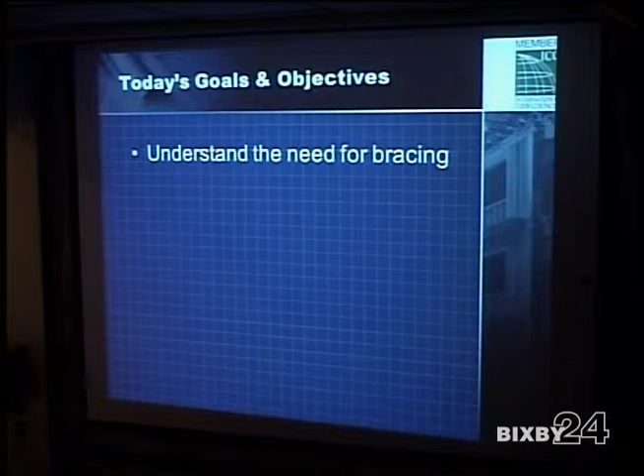The objectives for today are to get you to understand the need for bracing and determine the most cost-effective solutions to meet that. We don't get up here and say, yes, I am Simpson Strong Tie, and talk about our products unless actually noted in one of our pieces of literature. I'm just here to talk about the code.

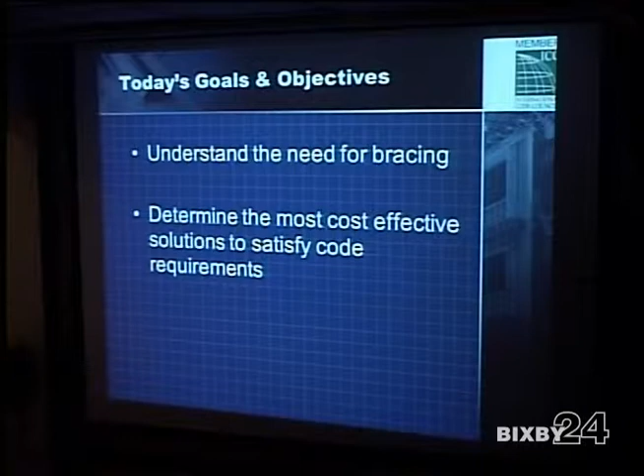We're not the only manufacturer of products, there are others out there, but the way I go about doing it is if I sit down with you guys and go over your plans, I'll suggest resizing a window, moving a door, or whatever. We don't just go through and say you need a strong wall here, you need hold downs there. That defeats the purpose of it. The purpose of the code is to do it the most cost-effective way. So if that's one where I assist you, that's what I do, go through and try to really eliminate any of the hardware.

So you want to do it in the most cost-effective manner.

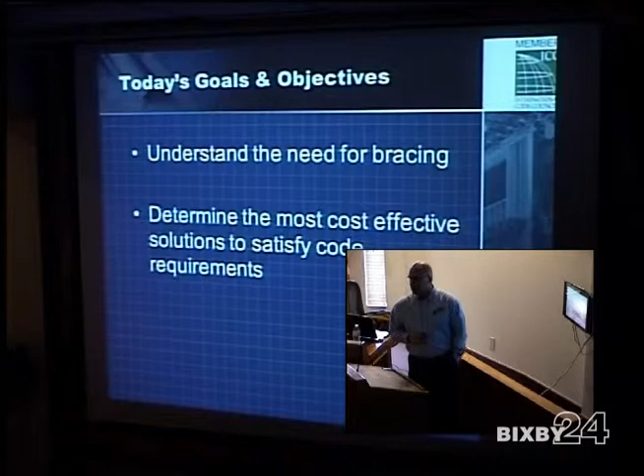Okay, so wall bracing. The three parts of wall bracing that you're trying to resist are these: racking, sliding, and overturning. So if a force is acting on your structure, it's going to start with doing these three things.

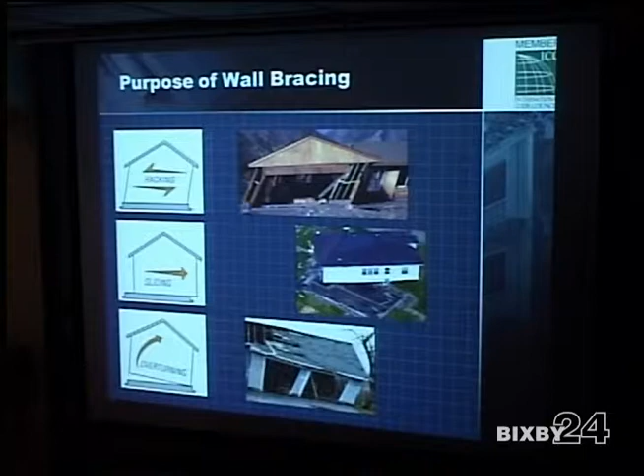So if you've got a wall built, no framing on, no sheathing or anything, and you apply a force to it, what's the first thing that's going to want to do? Right, yes sir, you're going to put force on there. These are just all hinge points here without any sheathing on it. The four corners there are just a hinge. So you apply that force there, and Cecil's exactly right, it's going to want to rack.

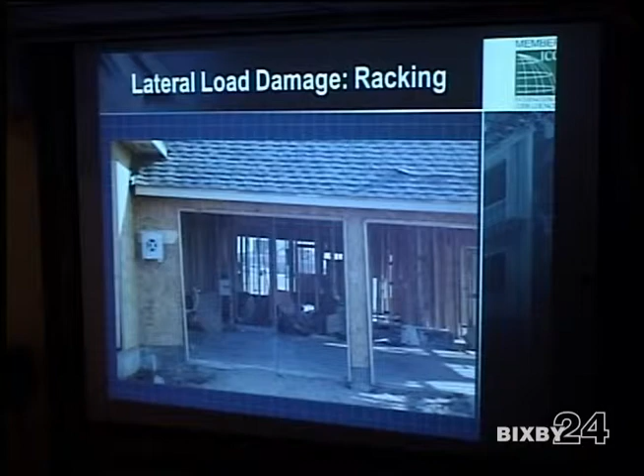So here are some examples of racking, even with sheathing on there. It's not completely built yet, but it does have sheathing, and you're going to get some racking there. So what you want to do to avoid the racking is put sheathing on there, nailing it to your bottom plates and your top plates, and that's going to help resist any racking.

So if you've resisted the racking and you apply that same force, what's the next thing it's going to want to do if it's stiff? Lift? It'll want to slide first. Well, it could - if there's enough pressure and everything's built, the roof's on it and everything, yes, it could definitely lift. But it's going to want to slide there.

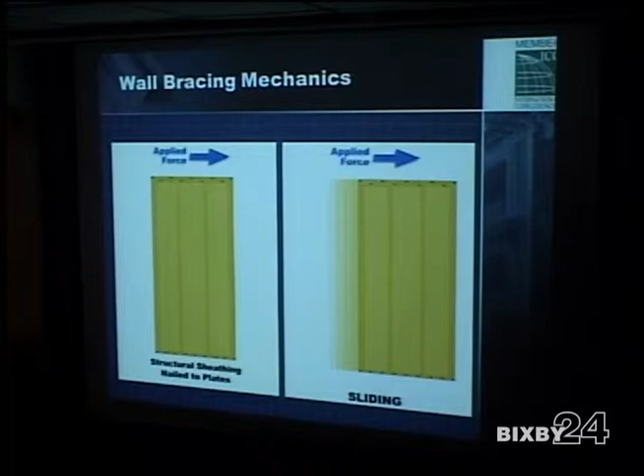So you'll see some pictures of foundations or how homes slide, and of course this is brick here, block here that you can see aren't filled. They were just filled in sections where they had anchor bolts if they did on this one. In a lot of areas you do see that, especially older ones, not so much nowadays. In older homes you'll see that they're supposed to be all grout filled cells in those blocks, but they weren't always.

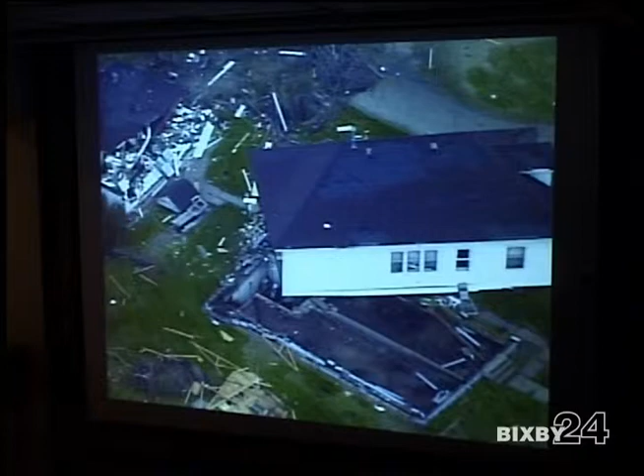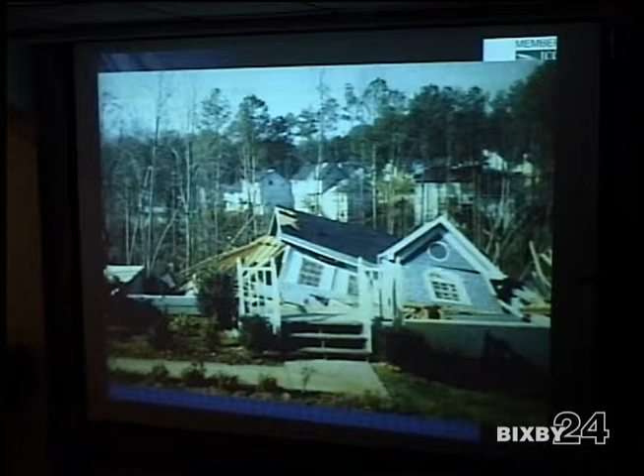This one here, you can see the house just blew off the foundation here, and you kind of look at it and say, well, there's a tornado, there's nothing's gonna prevent that from happening. But a lot of the shrubs, you can still see flowers on shrubs and stuff, so it's not that it was a direct hit from a tornado, maybe outlying.

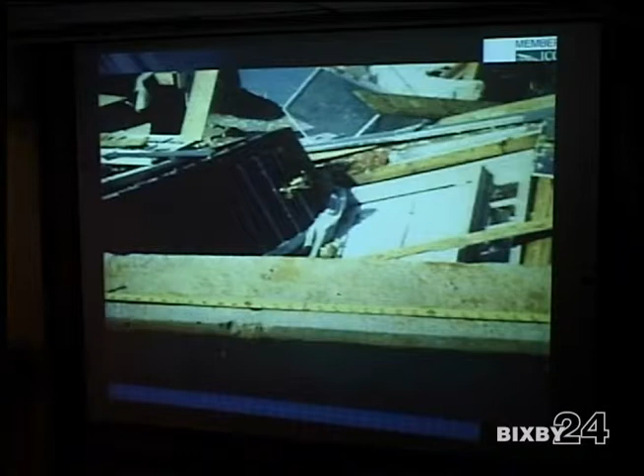What you can see is there's just some holes here, and then maybe some shot pins or cut nails probably. Some municipalities used to allow just cut nails. So if it's not positively attached to the foundation, that's what it's going to want to do. It's holding on for dear life, trying to stay to the foundation there, but it dragged all the way across there. So good positive anchorage into the foundation, which code requires half-inch diameter bolts, 7 inches embedment, 6 feet on center.

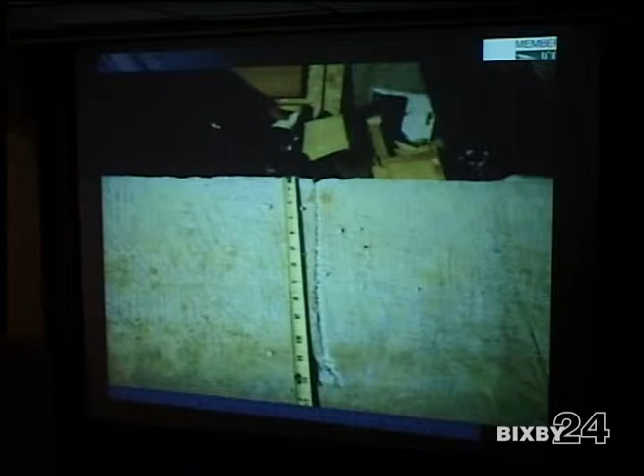And there are alternatives to that. Some people will use products like these here, where if you have an L bolt that's misplaced, or they don't know where walls are going to be, studs or openings, the L bolt may fall in line with a stud. So if it falls in line with a stud, you're going to have to cut that bolt off and replace it. With these, you put them in during the pour. It's a product where one leg can go up a stud and the other can go over the sill plate, or they can both go over the sill plate. So you don't have to worry as much about misplaced L bolts when it comes to studs with a product like this.

And then we've got products—a lot of people have post-installed products for misplaced L bolts, misplaced anchorage. If you have to have a splice by code, you have to have an anchor embedded into the concrete within 12 inches of that splice—no more than 7 bolt diameters, and no less than 7 bolt diameters, no more than 12 inches from that splice. So in that case, a lot of people will end up using possibly wedge anchors for that application.

But wedge anchors, no matter who the manufacturer is, you can't use wedge anchors for sill plate applications because of edge distances. It's an expansion anchor, so when you're tightening it down, it's just putting forces on that concrete. So that close to the edge, if you were to torque it to the recommended torque—recommended torque for a half-inch wedge anchor is 60 foot-pounds—well, no one knows what the torque's supposed to be, and no one has a torque wrench, so you may not be tightening enough, or you may tighten it too much and actually slip that sleeve off a little bit. So if it actually is engaged, it can just slip out very easily.

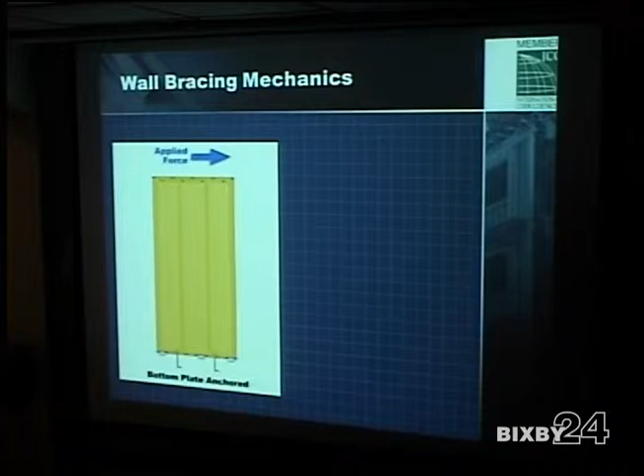So once you have your sheathing on and you're positively anchored to the foundation, well, it's no longer going to rack, it's no longer going to slide. So now the next thing it's going to want to do is overturn - it's going to want to try to pry apart from this bottom plate, because that bottom plate is attached firmly to the foundation there.

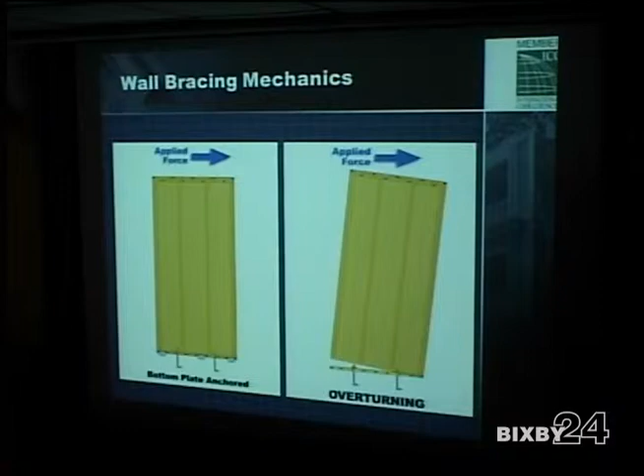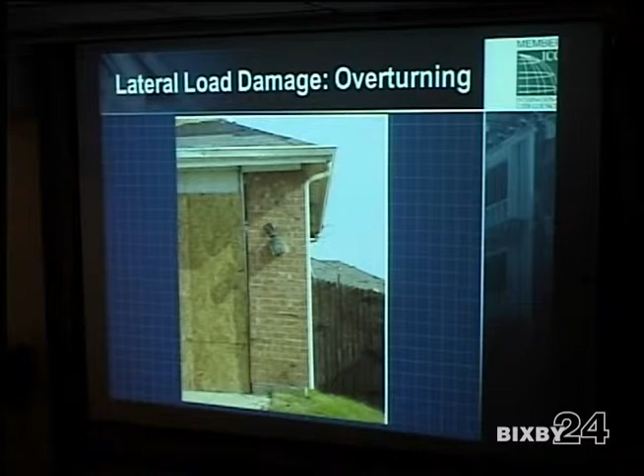So now what you'll want to do to prevent overturning is have some sort of hold down. It's going to positively attach to the foundation through the sill plate and into those outer panels. This would be a shear wall panel, brace wall panel, now that you're using the hold downs. So that's going to keep that panel in place - it's not going to overturn or rack because of all your sheathing, it won't slide because you're anchored into the foundation, and now it won't overturn because you're resisting those forces on the edges.

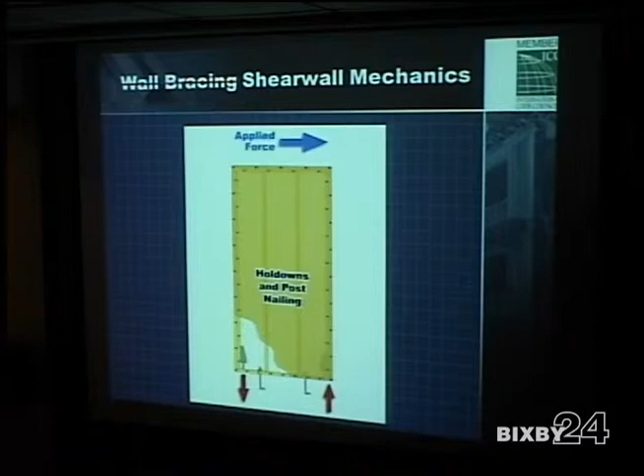Requirements of the 2009 IRC. Some of the terms of brace walls, just to kind of break it down into what exactly brace walls are and what they're comprised of. What they are comprised of are brace wall panels. Within one brace wall line, you have brace wall panels. And the height of the panel is obviously the height, and then the length, or sometimes they'll say the width, is just that - how wide it is or how long it is, not the height.

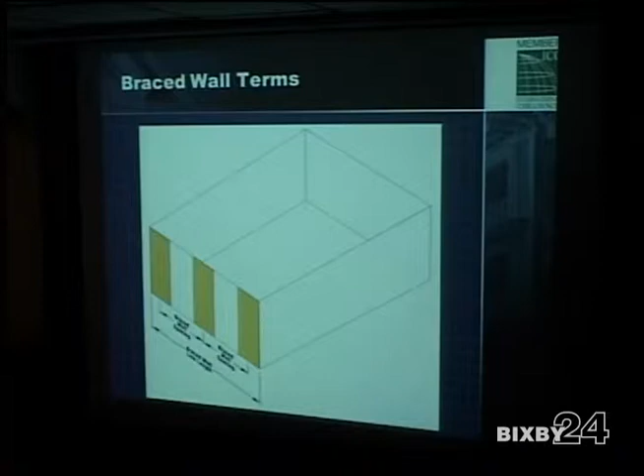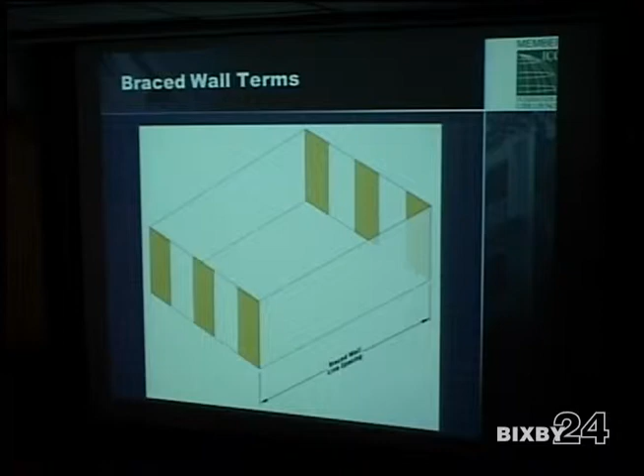Then you'll have brace wall panel spacing requirements, and your brace wall length is, from this whole wall here, the length of that brace wall. We go into the spacing of brace walls, the ends of brace walls, what's considered the end of the brace wall, where you can actually tie it into another wall, or it has to extend to an exterior wall. And then you also have brace wall line spacing - maximum requirements can't be over 60 feet between brace wall lines. We go a lot more into detail on that.

Brace wall lines: code states that all exterior walls have to be part of a brace wall line. So that's what you look for at first.

Whenever I'm doing a brace wall line layout - real quick on layouts - in 2009 the code got updated so that building officials now have the authority to require brace wall permits and plans to be marked up with your brace wall lines, how much bracing is required on those wall lines, and how you are getting that amount. Where are you actually getting that? What method are you using? Some municipalities require this, and really that's the only way you can know you're building to code, because if they don't mandate that you mark up your plans, they're just out there looking at wall bracing.

They don't know how much bracing is required on each panel or wall, so it's kind of a crapshoot. I know a lot of municipalities aren't requiring brace wall line layouts, but at least if it is a brace wall panel, that panel has to be built to code. You may not have enough bracing on that wall for the whole wall length, but as long as you're calling something a brace wall panel, it has to be built to code. So that's kind of what they're doing. But like I said, some municipalities are requiring plans to be marked up, and that's what we'll go over.

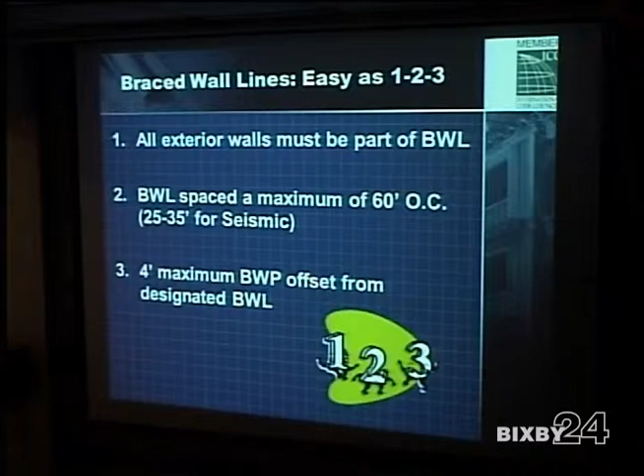There are also some seismic requirements that we don't fall under, so all we need to worry about is the 60 foot on center for your brace wall line. Every exterior wall, in the same parallel direction, can't be more than 60 feet apart. You also have offset requirements - you're allowed a 4 foot maximum offset from your brace wall line, and we'll go into detail on all of that. But the example here is that all exterior walls have to be part of the brace wall line.

That's exactly how I do it - I go through and make sure all my exterior walls are accounted for, part of one brace wall line or another. Maximum of 60 feet on center, and this here is shown with an offset.

I won't use this example to explain the offsets - we've got more examples to show you. But it shows a maximum between this brace wall line and this one is 60 feet, and the same between B and C - maximum of 60 feet. Designated location of brace wall line at building exterior, 60 feet.

The note at the bottom says brace wall spacing from brace wall line B is the greater of the distance between A and B, or B and C. It'll make more sense once we put it into the calculator and see what it prints out. It'll show that if this is 60 feet and that's 35 feet, it's going to show a distance of 60 feet on your brace wall panel, because the bigger distance - between A and B, or B and C - is going to govern how much bracing is required on brace wall line B.

So you can't say that 35 feet between B and C requires less bracing on B than if brace wall line A were all the way over here at 60 feet apart. That's how the code interprets it - that's why they designate the amount of bracing required on this wall line and this wall line based on that distance.

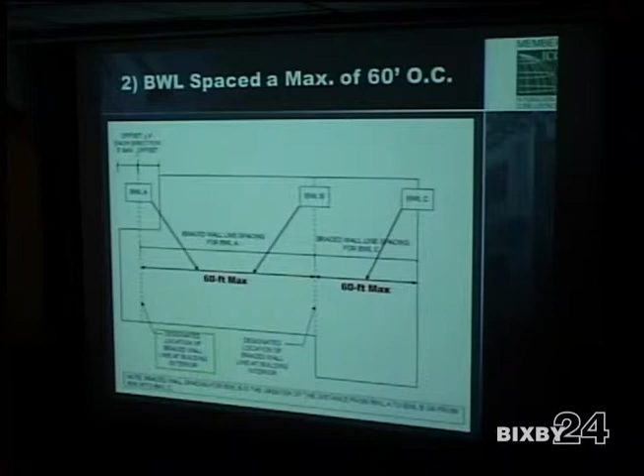Now, how is that stopping at the offset? I don't understand how that offset is. Well, yeah, it appears to me that that should be 64 feet. Yeah, well, I'll show you here now.

We'll go over the offsets and angles and everything. So part 3 of that was a 4-foot offset. Your brace wall panels and a wall line may be offset 4 foot maximum out of plane offset, or 8 foot maximum total out to out. So we can go through all these examples here.

Say 2006, all you had was a 4-foot offset. You couldn't go any further, like this one here. This is a brace wall line here, you went 4 feet, okay, that's as far as I could go, and then I can bring it back here. So in 2006, you can say this is a brace wall line to here. And then you had to say this is a brace wall line in the perpendicular direction, and this is another brace wall line, just because of the offsets.

So in 2009, they put in terminology: designated brace wall lines. Some people call it imaginary lines, because there is no physical wall on here. There's no physical wall. The physical wall is right here.

But as long as from your designated wall line, or your imaginary wall line, the one that you designate as your wall line, you have a physical wall within 4 feet on either side of that line, then you can say that that is a designated wall line. So you're a maximum 4-foot offset from the designated wall line, like that first bullet says, and then you're 8 feet from out to out maximum.

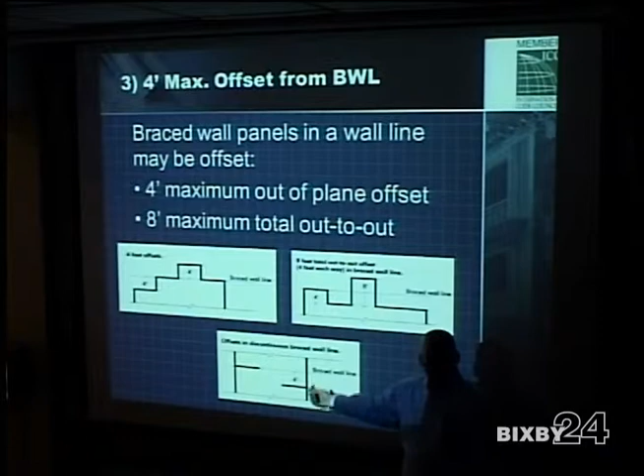Kind of same thing when you're going discontinuous for an interior wall. If you're saying that, you can do it either way. So this is my wall line, as long as this is 4 feet here. My designated wall line could be this one here. It doesn't have to be this one, but we just chose this one as your designated one.

So designated, and now it's 4 feet within there. And so that is allowed, depending on the distance between the end of this wall and the end of that wall. We'll go into that as well.

Yes. Can a single wall count as part of 2 separate brace wall lines? If it's got offsets of 8 feet, can this wall be a brace wall line and also be part of another brace wall line here? No. You have to just choose which one you're gonna allow. You can't allow one wall to count towards both.

It's putting too much onto that one wall. If it's loaded, it's trying to go to one or the other, you know, try to pick it out. I don't know engineering terms on that, but it can only be designated, or it can only count towards one wall. Is there a formula or something to identify which wall would be the best one to combine with, or kind of just discretion? Discretion, and really the house plans.

And it may be that it takes you running it through the calculator to actually determine that. I've never really seen any issues of where I would need to pick to go to one or the other and have any issues, because if it's that close, if you've got one here and you're wanting to count it to here or to here...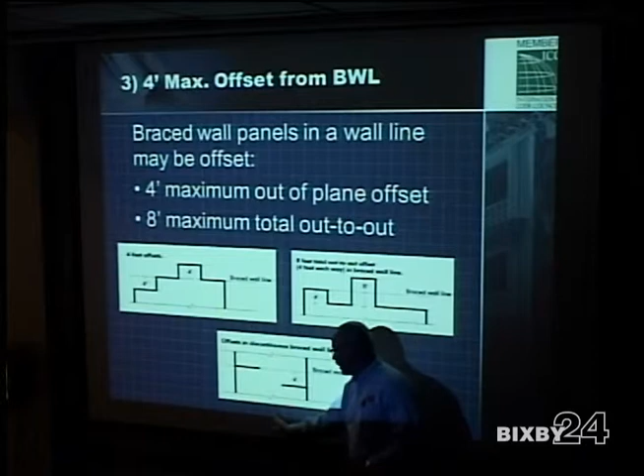They either have to stop at an exterior wall or a perpendicular braced wall line. We go over that as well. You can't just stop it in the middle of the room. It has to stop at a perpendicular braced wall line, so you have to have a line going through here if these were two different walls, two different wall lines. We'll go more into that as well.

All braced wall panels within a braced wall line shall be permitted to be offset from the designated braced wall line. That's exactly what we're saying. Where you see this come in the most is at the front door area and then on the patio. And that's where you're gonna be trying to figure out, do I have that 8 feet that I can use for that offset, so I don't have to put another braced wall on? We have examples of those in here.

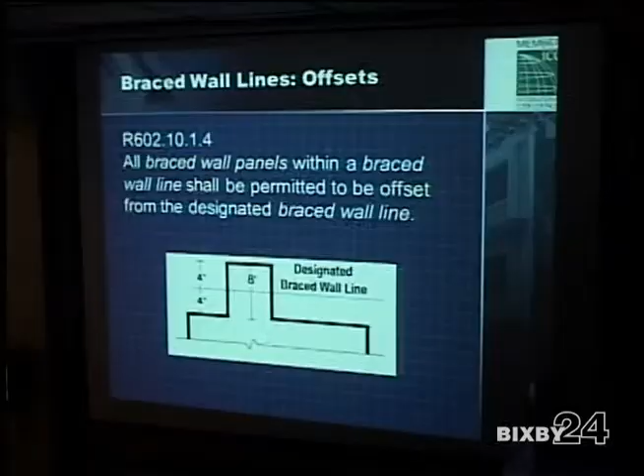So a lot of these will start to make more sense once we actually go through the plans here. All exterior walls are part of a braced wall line, you can go through and figure out, these are my exterior walls. We know these have to be part of a braced wall line. Now we just have to figure out how we're gonna go about doing them.

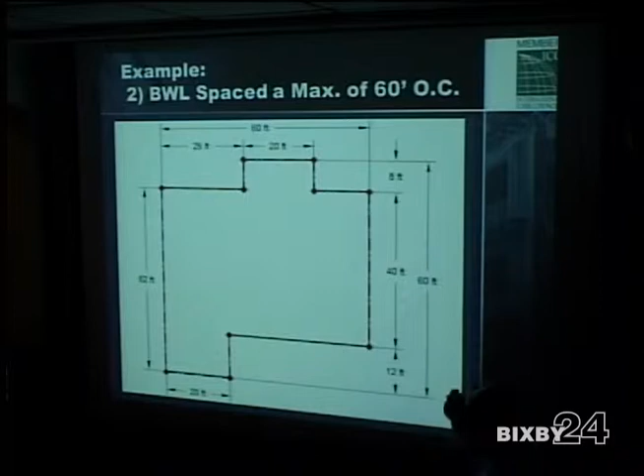You've got a maximum 60-foot spacing on those, so from here to there is 60 feet, and from side to side is our 60 feet. So we don't need to come up with any interior wall lines to divide that out. If that was 70 feet from front to back there, then you would have to have another braced wall line there somewhere, which is the beauty about today's homes, is that there's offsets everywhere. So even if it is an 80-foot long building, you're gonna have offsets in there, you're gonna have other braced wall lines automatically.

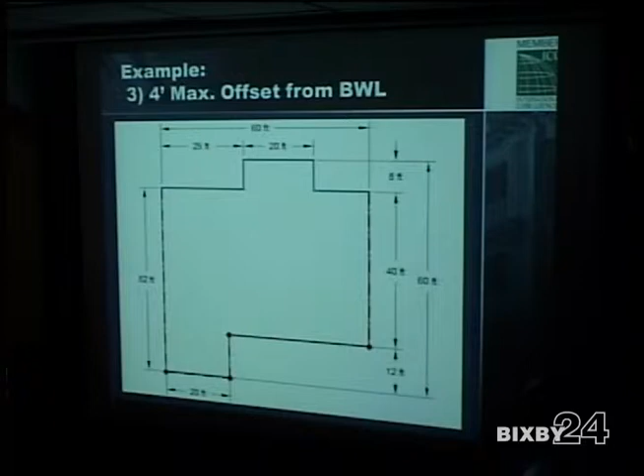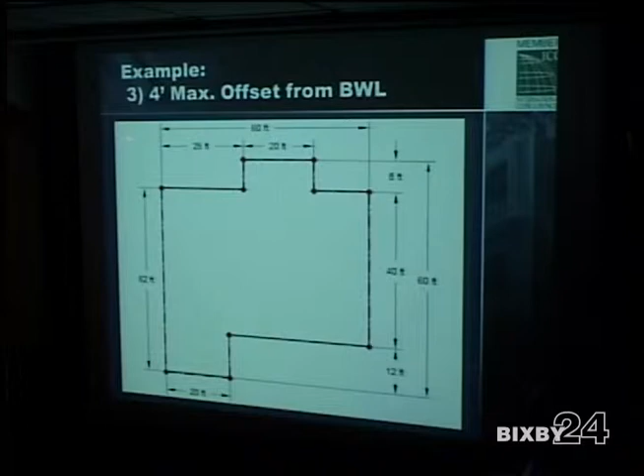Now we're gonna talk about the offsets here, maximum of 4 feet. So from this one here, you designated this as a wall line. Well, it would have to be because this is 8 feet there. So that would have to be its own wall line, or you could say, conveniently, that's 8 feet. So you've got 8 feet offset, I can designate a wall line right down the middle, as long as my physical wall line falls within 4 feet from each side of that imaginary or designated wall line, then you're good to go. What if we have a 12-foot offset?

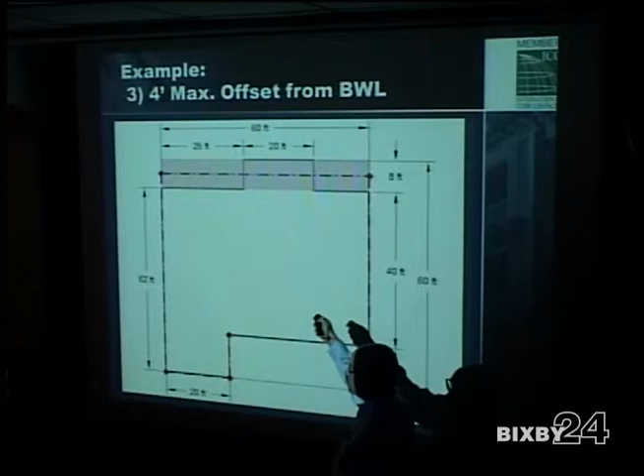If that was 12 feet, then you would end up having to say that this is a braced wall line, because that's 20 feet there, over 4 feet. I would say if that was a 12-foot offset there, this is all one wall line going across here, even though there's no wall here, as long as you have a braced wall panel there and a braced wall panel there, and they're no more than 25 feet apart on center.

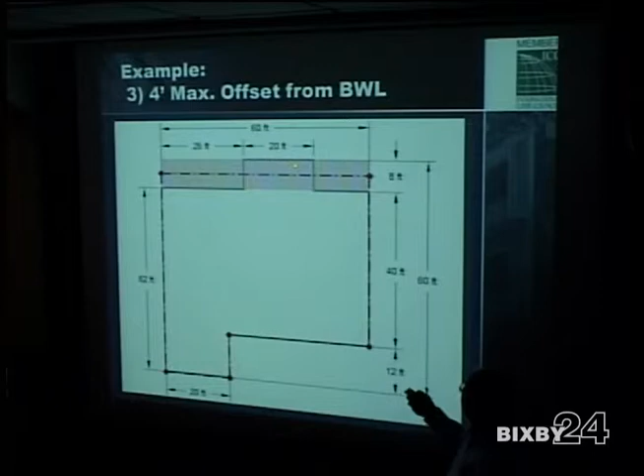If it's a 12 foot offset, then you're gonna have 2 braced wall lines, and that one will continue on through. So if this was 30 feet distance between here and there, you would say this is a braced wall line, this is a braced wall line, and that's a braced wall line, because your braced wall panel spacing can't be more than 25 feet on center. We go into that a little bit more. Good questions?

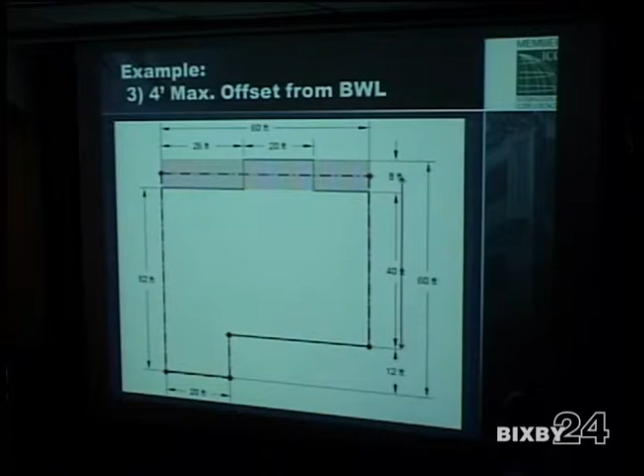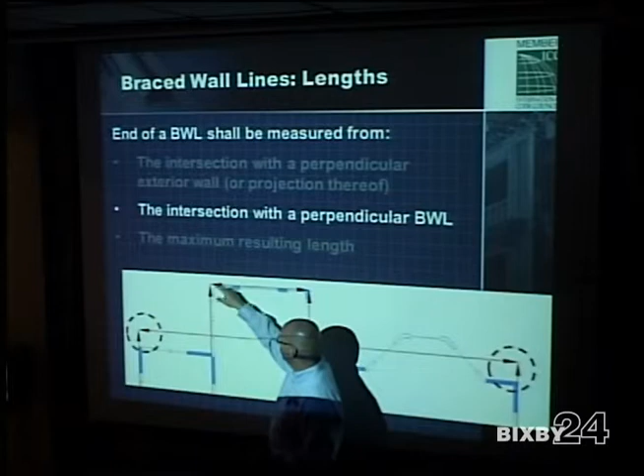Or the intersection with a perpendicular braced wall line. This is the right slide for this one here. So intersection with a perpendicular braced wall line. If this is a perpendicular braced wall line here that's more than 8 feet, you can say that it stops here, or the maximum resulting length.

I don't like this slide here, let me look at that, I think I'll really put this one in. What this actually says, don't look at the example there.

Look at the plan here, we show a good scenario, and it's going to be at the front. Looking at the front, there's a study and then the covered entry. If you start at the study, we're going to designate a braced wall line probably right down the middle of that offset there.

That offset is 6 foot 10 inches, I think. We would designate a wall line going from side to side there, starting at the study. If I bring my designated wall line over to the other side of that study, that's an exterior wall. I could stop it there, but I'm joining these two walls, the front of the study and the entry, so I'm actually going to take it all the way across.

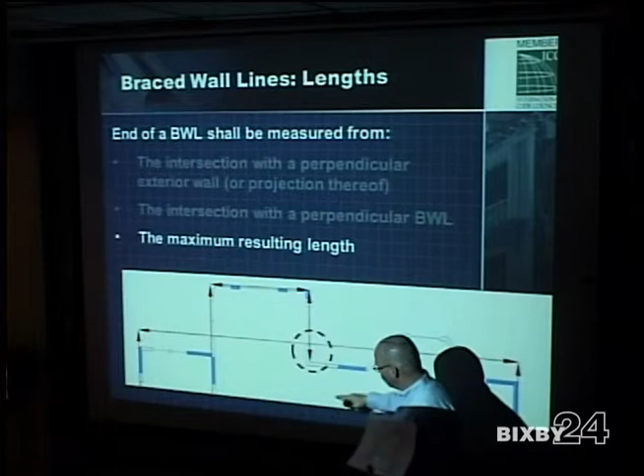I could stop it at this next exterior wall, a perpendicular braced wall line, and be okay. Or I can have it go all the way through, picking up interior wall lines if needed, all the way to the other side. What this really says is what I referred to earlier: you have a wall line here and a wall line here. It has to stop at a perpendicular braced wall line, either interior or exterior, but it cannot stop just in the middle of a room with no perpendicular braced wall lines in it.

You cannot add any interior wall to the braced wall line unless you apply the requirement to that wall. You can't just say this is a braced wall line. Your interior braced wall lines have to follow the same rules as your exterior, whether you use continuous sheathing or intermittent methods on the inside. It has to follow the same type of requirements as your exterior wall lines.

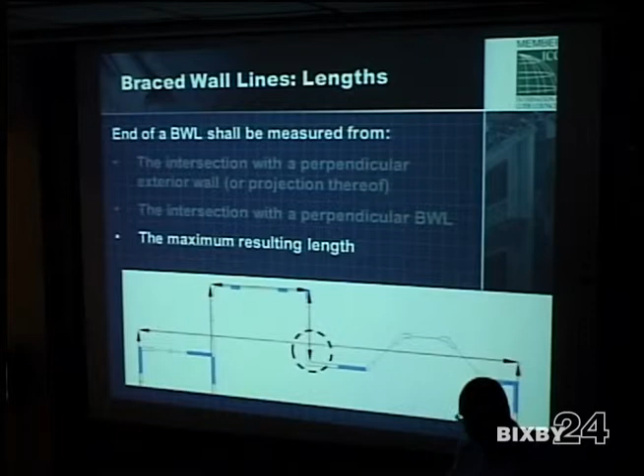What about the sheathing? The sheathing on interior walls—we'll go over all those options, what you have for interior and exterior. So you've got the plans here.

Now you might use your book to put under it and get out your highlighters, because what we're going to do now is designate and mark up our plans for our braced wall lines. And then from there, we go into what the wall bracing requirements are, and how you're going to get all your bracing on there.

Let's say one thing, and these are just general rules—if you remember this, it'll help a lot. Each braced wall line has to have a panel at each end. Each braced wall line has to have a panel 25 feet on center. Minimum bracing for each wall is 4 feet. No braced wall line can be more than 60 feet; if it is, you're going to have to put an interior one in. So those are just some basics there. If you remember that when you're doing bracing, it'll all let things fall into place.

And kind of how I broke it down into the presentation, I went ahead and started with braced wall lines now, because we're not concerned about panels right now, or how much bracing is required on any wall. All we're worried about right now is just the placement of braced wall lines—the placement, the spacing, the offsets, the angles.

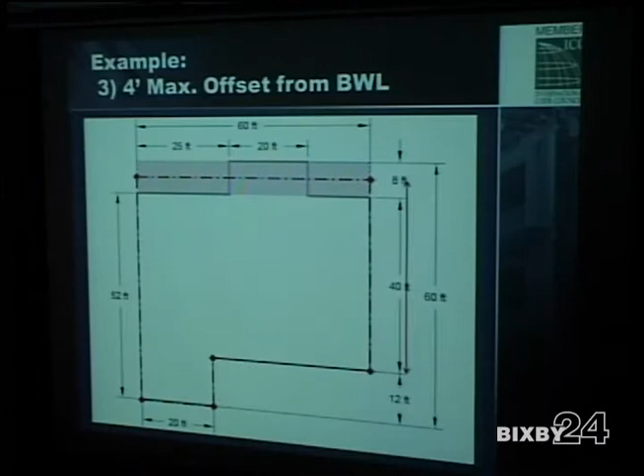Speaking of angles, we can go back to this one here. It says that walls are permitted to be angled no more than 45 degrees and no longer than 8 feet. It can't be more than 8 feet of an angle, or it has to be its own braced wall line. So if you're coming along here with a 70-degree angle and 10 feet long, that's braced wall line A, this would be braced wall line B, and this would be braced wall line C. So you can count it as bracing, as part of a braced wall line, if it's 45 degrees or less, and less than 8 feet in length.

And if you do that—say this is 7 feet, 45-degree angle, and 7 feet—does it make any difference which line you count that towards, whether it be this one, or both?

What do you guys think? Do you think you should be able to count it for both, or just one and you pick?

So it's an angled wall. You've got your parameters of the length and the angle that it can be. So what the code says is, the angled wall can only be part of one other line. You can't count it as part of this wall and that wall. So you just pick whichever one.

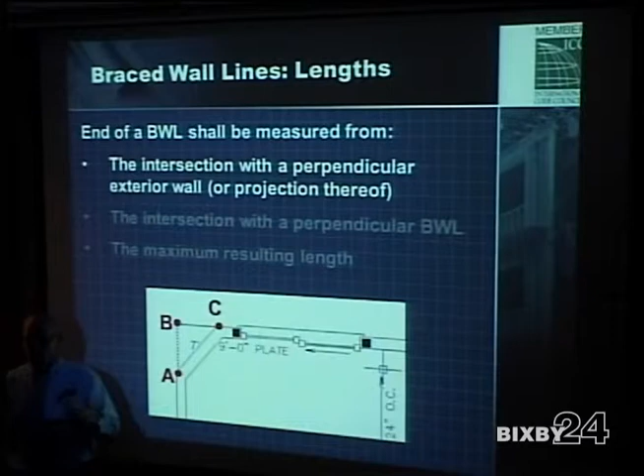What the code says is that the length of this wall can only be counted in this direction or that direction. You can't take 50% of it and go there, and 50% go here, even though loads are being applied that way. If you're actually loading that with wind, they're going 50-50 direction.

So, as I say, maybe from the engineering side, builders said, we need that flexibility. And engineers said, okay, well, these are the limits, it has to be 8 feet. You can't have a 20-foot section and still count it as one or the other, it has to be its own. So I think that's where some give and take is done there.

The code allows you as the builder to design it how you want to. You can put it either way. What comes into play a lot of times is that wall has windows and doors in it. Now there's no bracing in it, so you have to start trying to figure out where do I need to go with it.

I have another question. You said if the offset walls are less than 25 feet, you cannot count them as a braced wall line. Let's say if you have an offset over 8 feet, 10 feet, 12 feet, whatever, does the length of the wall have to be 25 or more? No, your wall can be 6 feet, 8 feet, 10 feet. Then you can count it as a braced line? Yes, anything over 4 feet.

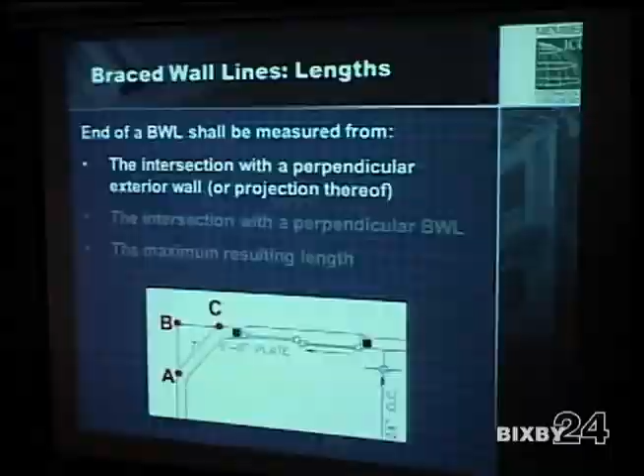In this example here, at the front you've got an offset of 6 feet 11. So this wall here, in the front and back direction, is going to allow these two walls to be combined. This one here is less than 8 feet, but every exterior wall has to be part of a braced wall line, so this little offset is now part of this wall line going here. But when you get to the back, that's more than 8 or 10 feet, so that has to be its own braced wall line. Anything over 8 feet in offset in that perpendicular direction has to be its own braced wall line because it's not counted here or here.

Does the 25 feet refer to the distance between two walls, or is it about the opening? If you have two walls in the same line, but they're 25 feet apart, 27 feet apart, those two can't be counted without something connecting them. So if there's a 25 foot space, and then 12 feet this way, you have a line here, a line here, and a line back here.

Is that right? Yes, I think I'm following what you're saying. In that example there, for a house that has a great room, you've got one wall at the front, front bedroom, there's a wall. Then you come to the entry, and the entry is 20 foot tall, all open space, where your plate height can't be more than 12 feet. So there's ways to design for great rooms, you can have your great room there, but as long as the wall at the front bedroom, that plate height is no more than 12 feet tall.

So I start at the very front of the house, so look at - you won't be able to see numbers here, and I can tell you what the numbers are. Go ahead and turn the lights on now, maybe you can see some numbers on your picture there.

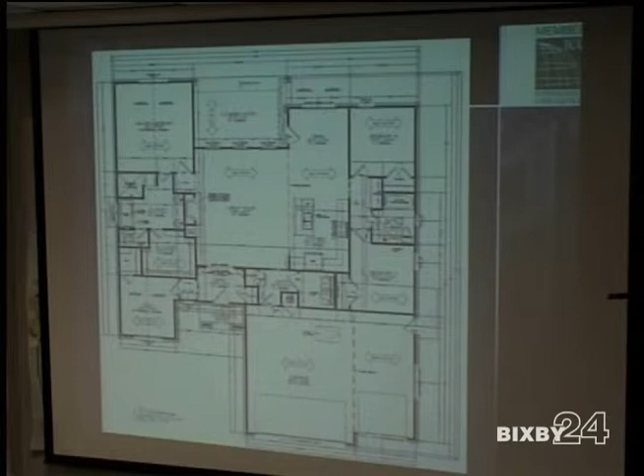Let's take some notes. Okay, so it's less than a 4 foot offset there, so you can designate a wall line. You can put that wall line anywhere you want—at the very front here, on this wall line here, right down the middle, wherever you want. I always put it as far back as I can, so it gets closer to this wall line. Because the closer your lines are, the less bracing you're going to need. So there's no sense in putting it up front, you can get it 2 feet closer.

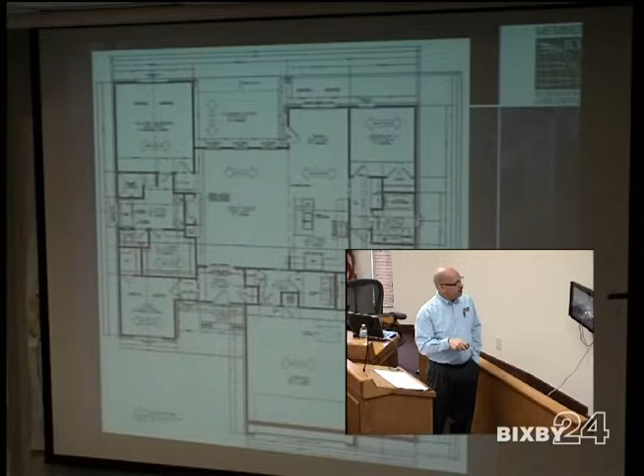So I put my designated wall line there, and that's the one I'm designating as my brace wall line. Okay, so the next wall I go look at is this one here, and I say, can I take this right here, but can I include both of those by splitting the difference because it's less than 8 feet?

And so I mark it up one way. There is no one right way to do brace wall lines. Everyone in here can do it and come up with something completely different, and every one of them will be correct. So the way I'm doing it isn't the only way you can do it.

Because you could stop it—I'm going to put my designated wall line all the way across here. So mine's going all the way out to out. I'm going to pick up some interior wall here, this back wall of the garage. You probably could stop it right here, because it's a perpendicular brace wall line here. It's an exterior wall, it's a perpendicular brace wall line, so you can stop it there.

The only thing is, you put it in the calculator, and it may say you need 10 feet of bracing on this wall line, just this section. You may not have 10 feet of bracing there. So I use a different bracing method instead of continuous sheathing—I use a gyp board because I've got all this area right here, and this is probably going to be enough bracing for the whole wall line. So I picked that just out of convenience, not to say that's the only way.

Okay, so the next braced wall line would have been this one, but it's included in this right here. So the next one—and again, we're just working exterior walls, since exterior walls have to be part of the braced wall line, so you don't have to worry about interior, unless you've gone through 100 plans and know what to look for. But just starting out, you look at the next wall line here. Can I count this one and this one as a braced wall line? Yes, because it's less than 8 feet. Can I count all 3 of these? No, because it's more than 8 feet.

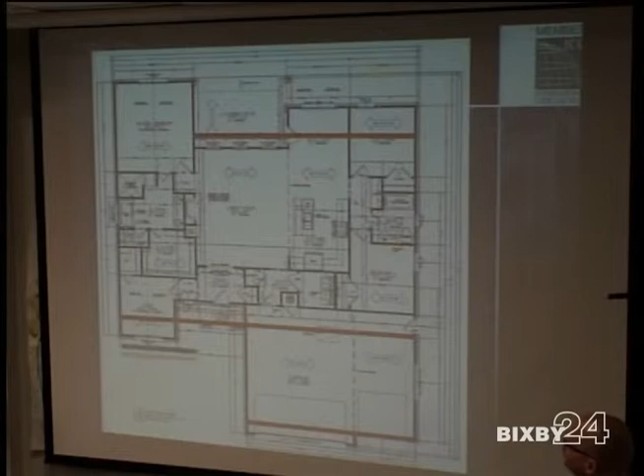Okay, so the next one is going to be this back one here. That's all on its own, no offsets to worry about there. So that's the direction that I go in.

I don't know what makes it easy for Bill or not. I always mark my lines up with brace wall line labels. This first one I put BWL for brace wall line: BWL 1-1, BWL 2-1, 3-1, and 4-1. That's just how I do it. You don't have to, but once I put it into the calculator and print it out, it's gonna have BWL 1-1, so I can denote that's the right one.

So that's all the exterior walls and brace wall lines in the side-to-side direction. Now you're gonna work in the front-to-back direction. I always start off with the left-hand side. Start off wherever you want, left or right, just keep it consistent—makes it easier for you.

I always start off to the left, just like I'm reading the book. So the left side is that one there. There's no offsets to worry about there. Front and back direction is usually the easiest one. I tackle the side-to-side direction first—it's more difficult.

Your next exterior wall is actually this one right here. But it's up to interpretation—we've got people within Simpson where our engineer says no, that is a brace wall line. This one right here, you have to count as a brace wall line even though it's in this wall line here. He says you have to count it as its own brace wall line because it's in the perpendicular direction, and none of the bracing here actually counts as bracing in this direction, which we'll go over. So that's what he said.

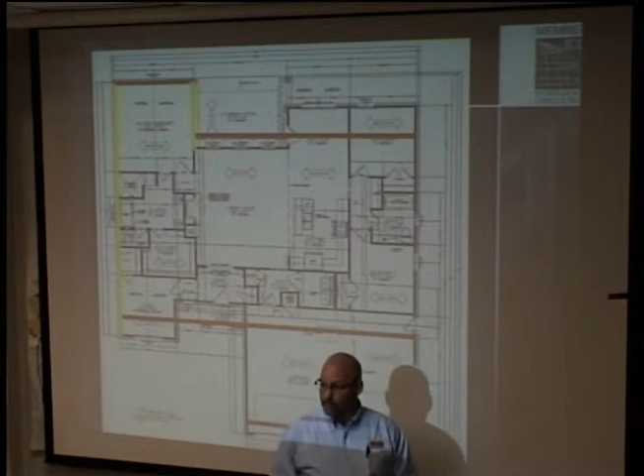It actually is braced, but this wall here actually is braced. In reality, on plan or in the field, it is braced, but you don't have to necessarily mark it that way on your plans. Again, there's no one way that is the right way. You can do it that way if you want, absolutely. That's extra—something you'd want to do if you want more than what the code requires.

In that case, let's say the front wall is 6 feet and the back wall is 9 feet or so. Can I count the second brace wall line front to back—the summation of these two walls, like 15 feet?

I should, because they are less than 60 feet apart. They are in one line, and both of them are exterior walls, and they have the requirements of the brace wall lines. So in that case, instead of having a 9 foot or 10 foot wall back there, I actually have another piece up front here, and both of these two walls—either I add to my calculation or don't—they are working together.

So in that case, I would say the second brace wall line would be someplace between these two, or one of them, with the total of both walls—instead of 9 feet or 7 feet, I'm going to have around 15 to 16 feet. That would be best practice, but not required.

And you could say this is brace wall line A1, B1, C1 if you wanted to break them into 3 different ones. If you didn't have this wall in the middle here—this is all open, like we do over here, and I'll show you.

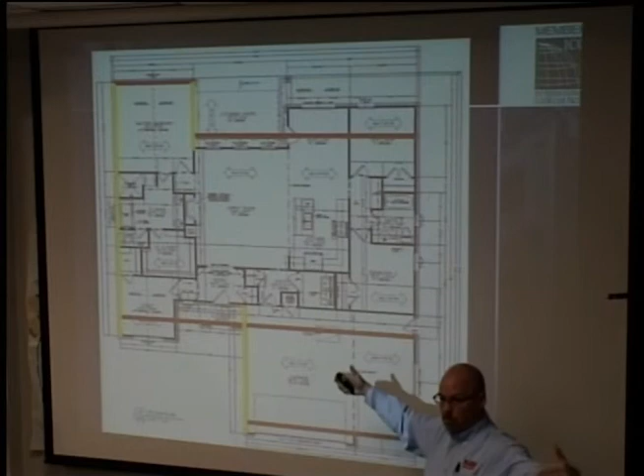An issue you have with this one being its own brace wall line goes back to what you were asking earlier about spans, how far apart they can be. So if this is its own brace wall line here, it seemed like—if I brought it all the way to here—I don't remember what the distance between there was.

If I was able to count those—no, I could not. Okay. Yeah, we could.

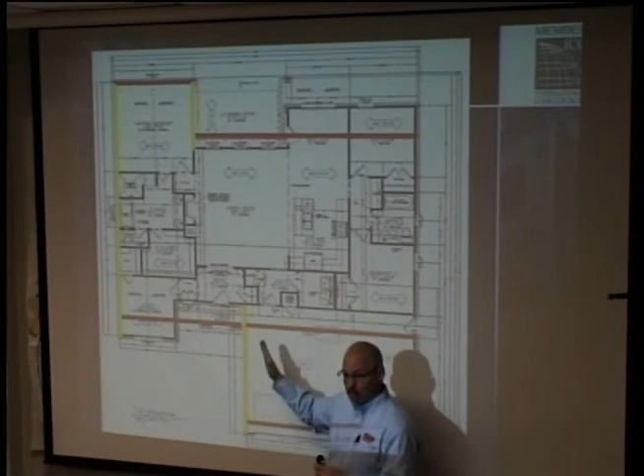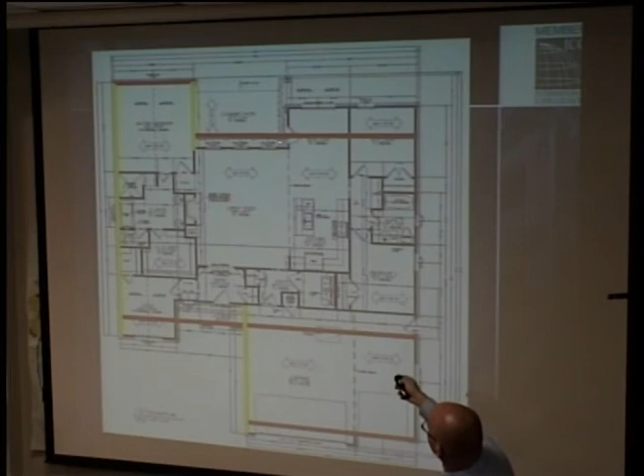You could possibly, if bracing allows, say that this is your designated wall line going all the way through and coming out the bare back wall there. But the only problem is you don't have any bracing in here—from here to here your brace wall panels are too far apart. So you can't; you'd have to put a wall inside here in order to connect this one to that one down here.

So on the side of economically building it most cost-effectively, with this section right here, running calculations, you may actually have to put an alternate braced wall panel there or a steel strong wall—that's a few hundred dollars. Whereas, like Bill interprets it, this wall line here is part of this one here, so you don't need to count it as a braced wall line.

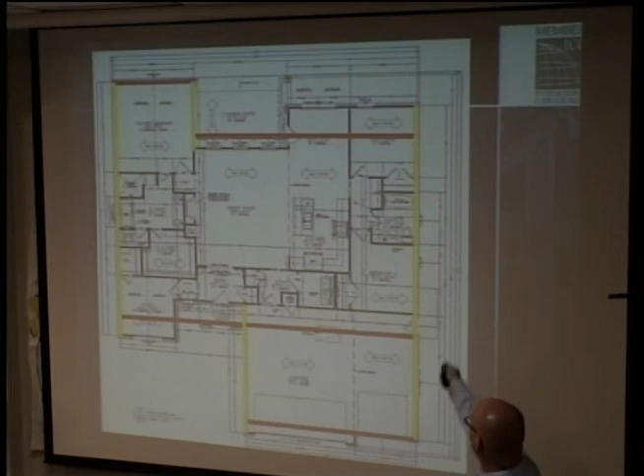Anything under 8 feet offset, you don't have to call it its own braced wall line. So that leaves you with the very last one here—no offsets to worry about, and it just runs from end to end there. Any questions on that so far?